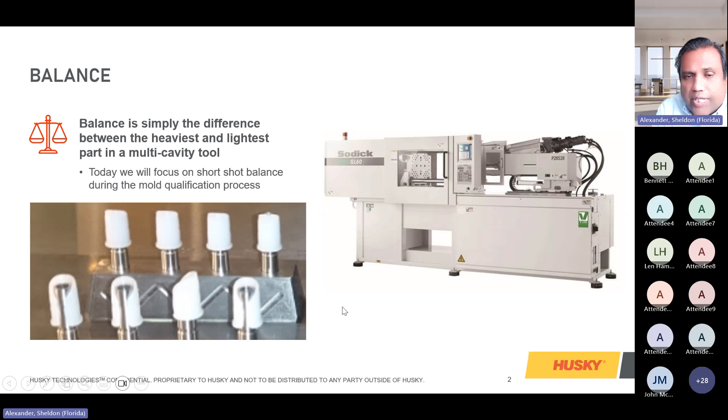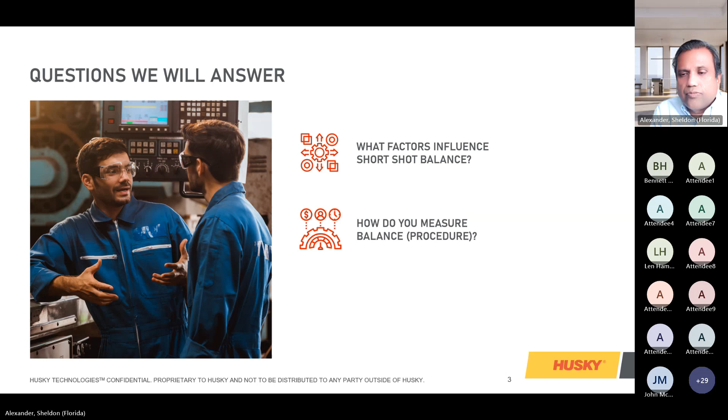All right, so balance. What's balance? Balance is simply the difference between the heaviest and lightest part in a multi-cavity tool. Today we're going to focus specifically on short shot balance, and short shot balance that's used during the mold qualification process. Questions that we will attempt to answer today are: what are some of the factors that influence short shot balance, and how do you measure balance, specifically the procedure that is used in the industry today? And then finally, balance expectations.

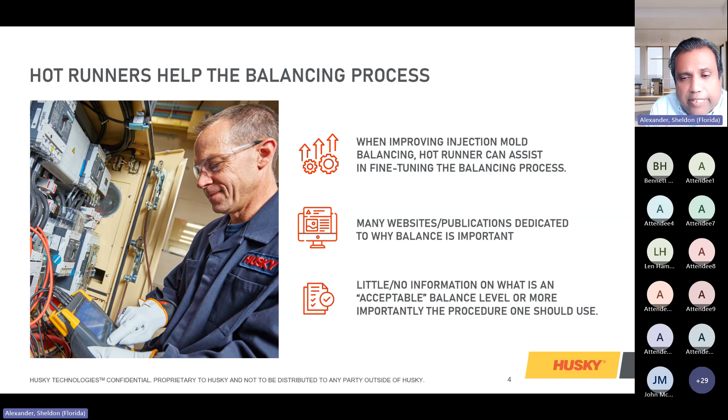So hot runners can certainly help in the balancing process. When improving injection molding balance, hot runners can assist in fine-tuning the balance process. There are many websites and publications dedicated to why balance is important. That's not something I'm going to cover today, but let's just say it is important. There is little or no information on what is an acceptable balance level, or more importantly, what procedure one should use in verifying short shot balance.

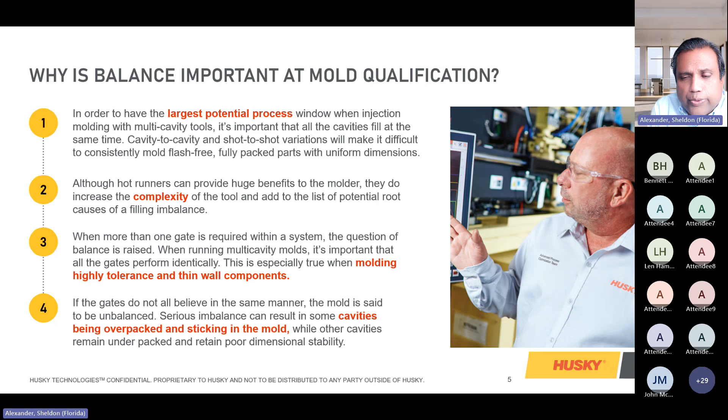And this is going to be the focus of this webinar today. So why is balance important at the mold qualification process? Well, it's important to give us the largest potential process window, especially when we're dealing with complex, thin wall, highly tolerance parts. What we can see if the mold is not balanced, we can get things like overpacking in certain cavities, dimensional instability, not just shot to shot, but cavity to cavity. But as I said, balance is an important tool, and an important variable when qualifying a mold.

So what factors influence short shot balance? First, the machine has a large impact, whether it's the tonnage, tonnage distribution, or the amount of tonnage itself, processing such as injection profile, melt preparation, cooling time, shot size, the resin, the mold, and of course the hot runner system. All of these contribute to the overall balance. For sure the hot runner geometry, shear effects, thermal profile, and gating style, whether it's a hot tip or a valve gate, play a role. I'll go into each of these variables in greater detail in the coming slides.

Here's an example of how the process can affect balance. In this application, it's a 32 cavity syringe barrel mold. Most customers and machine suppliers send the signal to open the valve stem at the same time you start injection. That causes the stems to not open all the way, at least not all of them, before you start injecting, which can lead to imbalance.

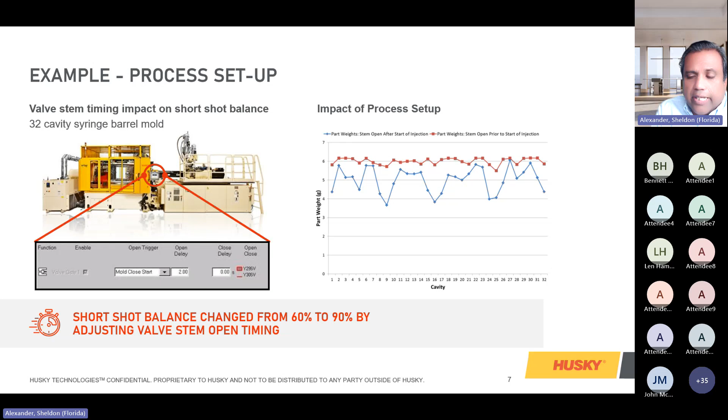In this example, we simply adjusted the stem timing, either delaying the injection or opening the stem early. One variable I like to use is mold touch — when the mold closes and touches before it builds tonnage, you send a signal to open the stem. That gives the stem about half a second to open before you start injection. As you can see, the short shot balance changed from 60% to 90% by simply adjusting the stem open timing. Either delaying injection or opening the stem early allows all the stems to open before you start injecting.

This example speaks to the resin. In this application, we're running a PC ABS system using the same mold, the same machine, the same process. The balance was about 65% using PC ABS. Switching to polypropylene, with the same machine, mold, and process except for temperatures — polypropylene runs at a lower temperature than PC ABS, but all other variables being the same — the balance improved from 65% to 93%.

This is an example of how the resin can impact balance, specifically if the resin is shear sensitive. Any styrenic base resin, whether it's polystyrene, ABS, or any resin that's shear sensitive or thermal sensitive, will have a fairly large impact on the overall system balance.

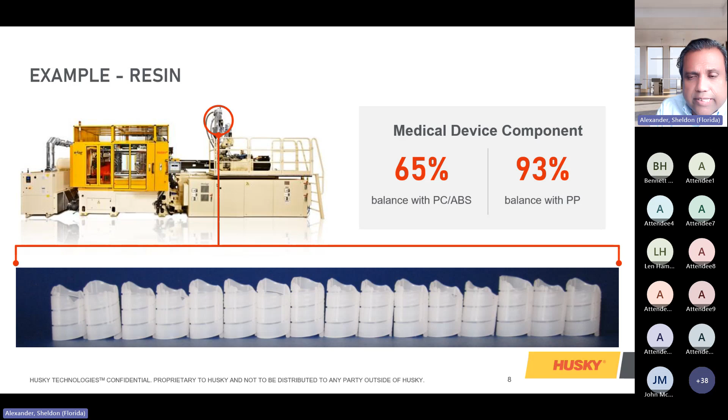For sure, the hot runner and controller can have a large effect on system balance — things like thermal uniformity and precise temperature control. I'll touch on the controller a bit, since there are a lot of controllers on the market. Some are very good, some are not so good. The way to look at a controller is like trying to reduce the light level in a room — there's a couple of ways to do that.

The first way is to turn the light on and off, say every second — on for a second, off for a second — that's one way to get 50% light into the room, but it's not the most optimal way. The most optimal way is using a dimmer switch that cuts the power by 50%. That's a good analogy for the different types of controllers out there.

What you want is a controller with PID, ideally PID squared, that gives you accurate temperature control, with algorithms tuned for the different zones. With any hot runner system, a tip zone is very different from a manifold zone, for example, so the type of control and the PID variables are very different between those two types of zones. Precise temperature control is important.

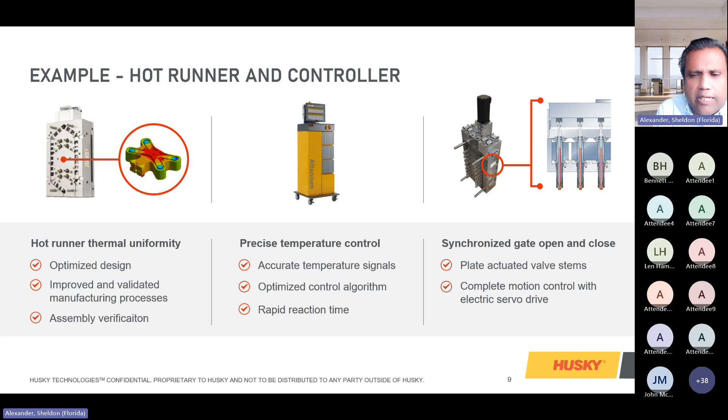Synchronized valve gate — the type of hot runner, whether it's a thermal gate or a valve gate, certainly has a large effect. Within the valve gate category, if it's a synchronized plate-actuated system or an individual system, I'll explain those differences in greater detail in the coming slide.

The most common type of hot runner in the industry today is what we call a thermal gate. I'd say this makes up about 70% of hot runners in the industry today. It was certainly the original hot runner that came out 40, 50 years ago. It's a fairly simple system, and there aren't a lot of moving parts.

After injection, during the hold stage, plastic begins to solidify in the gate. A combination of hold time and cool time causes that plastic to freeze in the gate, creating a plug. When the mold opens, it separates from the gate, creating what we call vestige, or a belly button type situation on the part. That height of the gate vestige could be about 1/3 to 1/2, maybe even 2/3 of the gate diameter, depending on the resin and the process. So the mold opening breaks that junction. Some of it remains on the part, some remains in the gate. What remains in the gate acts as a frozen plug to prevent resin from drooling into the cavity while the mold is opening and the parts are being ejected.

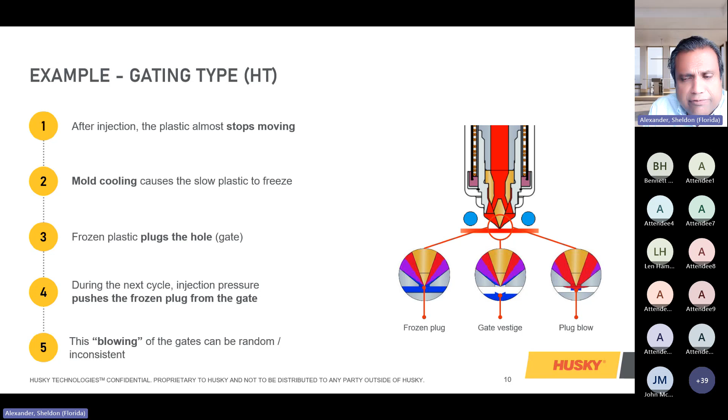Next, we have valve gates. Valve gates were the next-gen hot runner system invented. First we had thermal gates, which are still the majority of hot runners in the industry today, but next came valve gates, which work on a simple principle. Instead of relying on a thermal shutoff to freeze the gate, we rely on a mechanical means of closing the gate. You have a valve stem that opens and closes. Before injection, the valve stem opens, allowing resin to flow into the cavity. After injection and hold, the valve stem closes, pushing forward to close that gate mechanically.

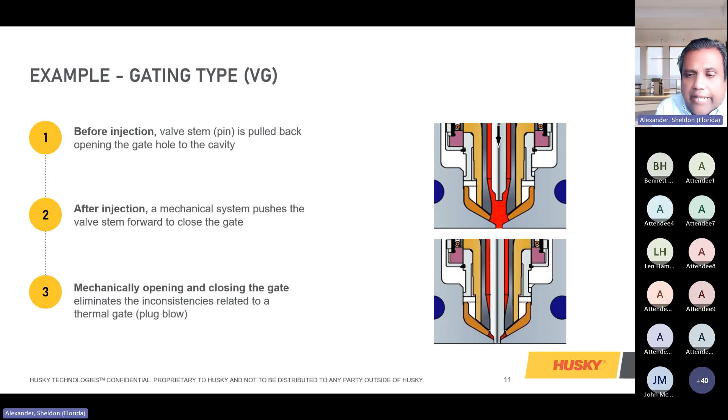As you can see, that plug blow phenomenon from the previous slide doesn't exist with a valve gate system. So naturally you get better balance with a valve gate system versus a thermal gate or hot tip system.

Next, I have an example of a hot tip versus a valve gate. As in the previous examples, everything stayed the same—same mold, same resin, same machine, same process. First, we ran it as a hot tip, and you can see with the hot tip system, the variation was about 0.44 grams, or the balance was about 70%.

Simply removing the hot tip and replacing it with a valve gate, the balance greatly improved—we went from 70% balance with the hot tip to 93% balance with the valve gate. The procedure we used, which I'll talk more about in the next few slides, was a 90% short shot balance. So again: hot tip, 70% balance; valve gate, 93% balance—a significant improvement.

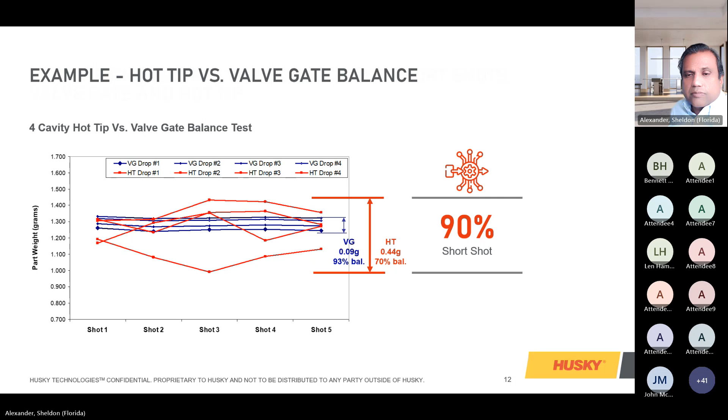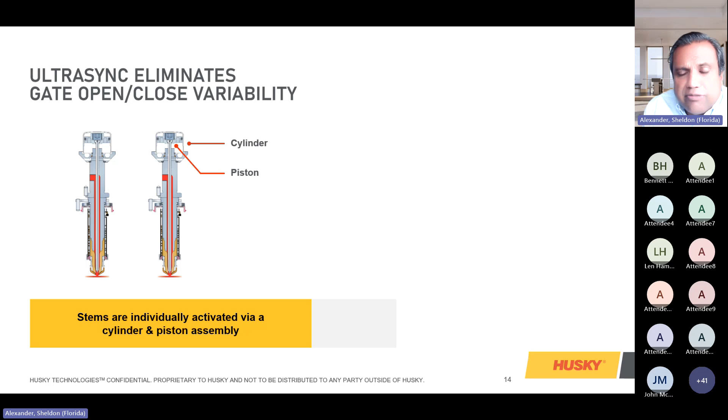So let's talk about valve gates a little bit. Valve gates are growing in popularity in the industry, specifically in the medical market. Overall, hot tips are about 70% of the market, but within the medical segment, valve gates are probably 70 to 80% of the market.

The primary type of valve gate in the industry today is individual piston valve gate configurations. Basically, each valve stem has its own piston and cylinder, and they move independently of each other. One issue that arises from that is not all the stems open at the same time, and that can cause imbalance, but also not all the stems close at the same time.

With small parts, specifically parts that Sodick machines are known for—small, high precision parts—that inconsistent closing can have a dramatic effect on the dimensional stability of the part. I'll explain that a little bit in the next slide.

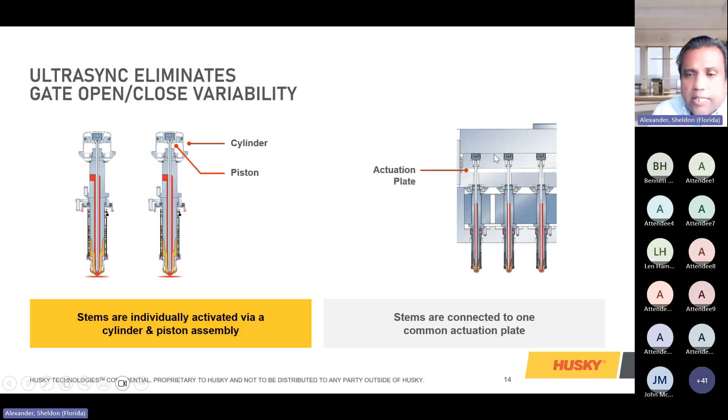As a result, the medical industry pushed us to develop a plate actuated system. With that system, as you see on the right side of the screen, all the valve stems are attached to basically an ejector plate, and that ejector plate is what's moved back and forth. That ejector plate can be moved pneumatically or hydraulically, but the optimal way to move that plate is with servo. I'll talk about that in the coming slides.

Not just in stem opening, but in stem closing—again, on very small, highly technical parts that have tight tolerances—the valve stem closing can have an impact on this. Let me explain why.

The majority of the valve gates out there use what we call a plunger shutoff. That means the valve stem is straight, and it goes into a hole into the gate detail, and usually there's a land. That land is anywhere from about 0.3 millimeters to maybe 0.5 millimeters in height, and the gate diameter is usually about 1 millimeter.

So when that valve stem closes, you need to push that 0.5 millimeter by 1 millimeter cone of plastic into the part, and that is essentially packing. If those stems are closing inconsistently, it's going to affect the dimensions. Again, I'm talking small, highly technical parts and resins.

In this application here on the top, this is a 32 cavity system. The customer suspected that the valve stem closing inconsistently was contributing to the dimensional variability they were seeing. So we outfitted the hot runner with proxy sensors so we knew when each individual valve stem closes. Not only did we see a range of dimensions across this one feature on the part, but we were able to find correlation between when the stem closed versus the dimension.

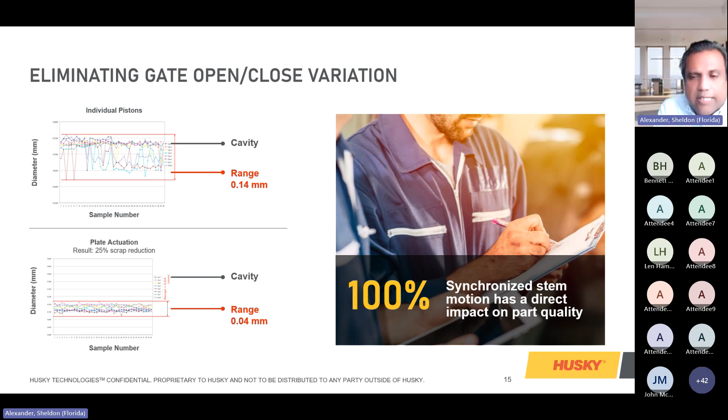So we converted the system over to a plate actuated system with synchronized stem movement. As you can see, the dimensional range dropped from 0.14 millimeters to 0.04 millimeters, and this reduced the scrap rate by 25%. So pretty dramatic improvement on this specific part because of the valve stem closing variation on an individual piston versus a synchronized valve stem movement system.

That determines your balance number as well. The more material you put in the mold, the better the balance is going to be. The reason for that is that the first-to-fill cavities slow down filling as the plastic gets to the back wall, allowing those cavities that are lagging to catch up.

So the higher percentage of fill, the better, and I'll talk about that specifically in the next couple slides. The higher the cavitation, so certainly higher than a 24 cavity system, whether it's 32, 48, 96, or 144, the more likely the balance is going to degrade as you go up in cavitation.

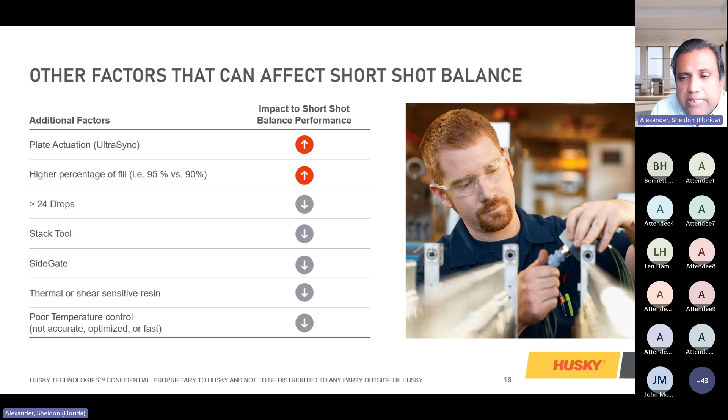Thermal or shear sensitive resins, as I also mentioned, polystyrene, ABS, nylon - these are resins where we see more imbalance issues. And then, of course, a poor temperature controller. So these are all things that can affect short shot balance performance, some positive, some negative.

So let's talk about how you measure balance. I'd say there are a couple methods in the industry, and the first is first-to-fill. On a first-to-fill method, you're focusing on that first cavity to fill. On any multi-cavity tool, whether it's 2 cavity or 144 cavity, there's always one cavity that fills first - that is your focus.

So you want to adjust your hold pressure down to near zero. You either want to keep your hold time or move your hold time to cooling. And then you want to adjust your transition point between first stage and second stage so that first part is where you'd like it to be.

An example of this is, let's say, 90% fill. Many customers I speak to have a procedure of first-to-fill at 90% of the final part weight. Variations on that are 95, 80, or 75 - any percentage really, but your focus is always on that first-to-fill part. So let's say you want that first-to-fill part to be 90%, you adjust your transition point so you can achieve that.

It will give you a correlation number, a value between -1 and 1. -1 and 1 means perfect correlation, meaning the short shot imbalance is a direct indicator of the issue you're troubleshooting. It doesn't mean it's the root cause, but it's a strong indicator that you should be looking at that. As I said, that's near perfect correlation. As you get closer to 0, that means weak correlation. So above 0.8 is strong correlation, and below 0.5 is weak correlation or no correlation.

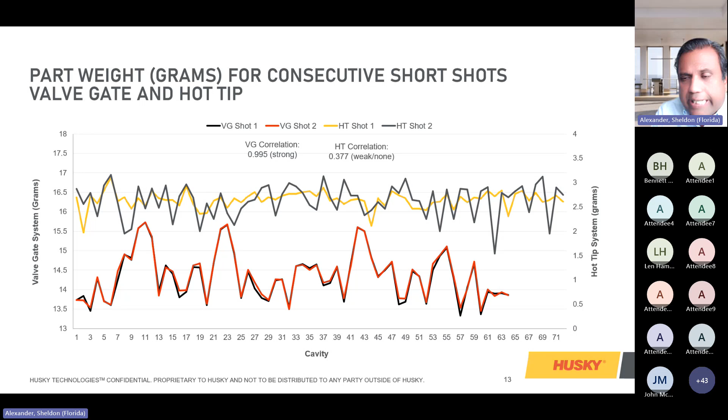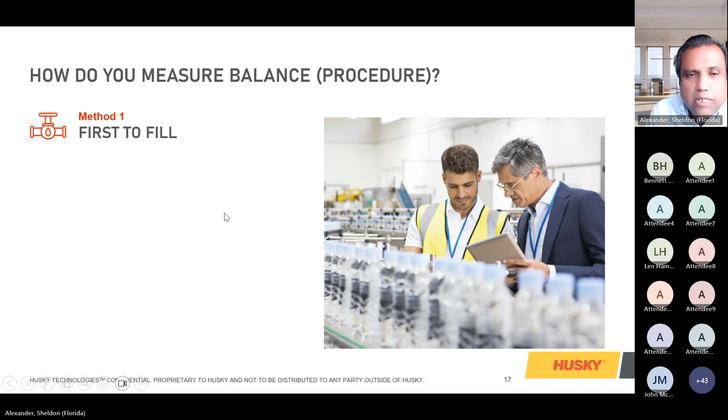Let me move forward here. As I mentioned, this is the first to fill method. I'd say probably about 60 to 70% of the customers I speak to use some variation of this procedure.

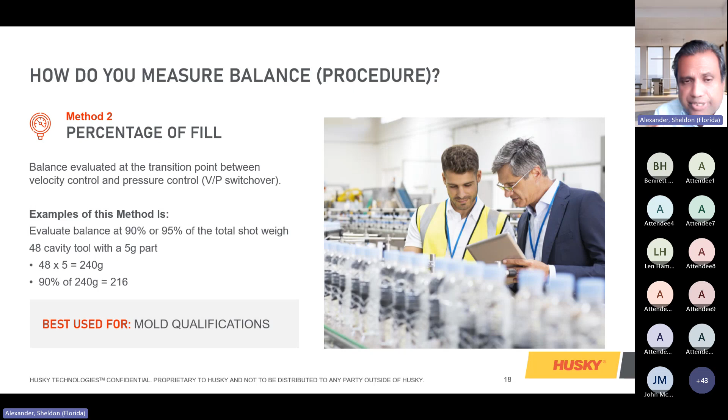The second procedure is what we call a percentage of fill. On the first example, we were focused on that first-to-fill part being a certain percentage of the full part. With this method, percentage of fill, you're looking at the entire shot size, and you want to put a percentage of the entire shot size into the mold. So let's go through the example. Same thing: you reduce the pressure to near zero, you move the hold time to cooling time, or you leave the hold time as is, and you adjust your transition point. Same as the first, but what you're looking for here is the total shot weight.

Let's say it's a 48 cavity tool with a 5-gram part weight. Full shot is 5 grams, so 48 times 5 is 240 grams. 90% of 240 is 216, so you want to put 216 grams into the mold. You do a short shot using the method and measure all 48 parts until you get as close to 216 as possible. Then you measure the parts and compare the heaviest to the lightest, and that gives you your balance number.

I prefer to use this method during the mold qualification process, and I like to use it at 95%. So I'll do 95% as a percentage of fill, and that's where I'll check my balance. The reason I do that is that it's as close as possible to what you're going to do in production. RJG and all the other guys that teach scientific injection molding talk about doing your transition from 95 to 98%. 95% is a nice number; it's at the bottom of that range. And that tells you what the balance looks like as you're going from first stage to second stage. So this is the method or procedure I would recommend for mold qualification.

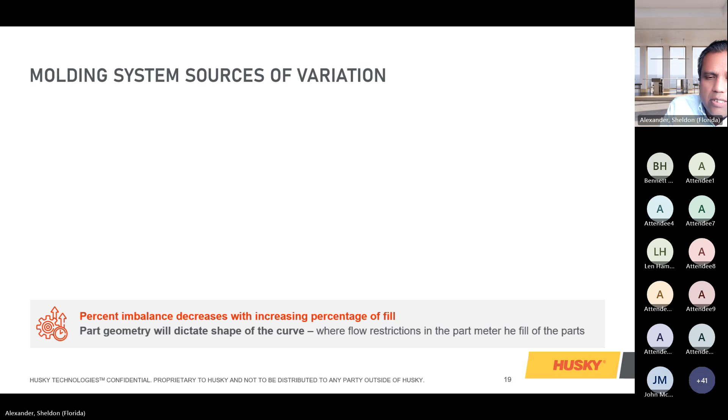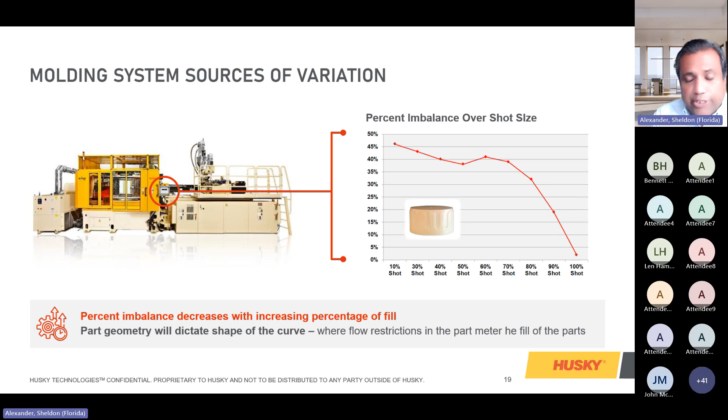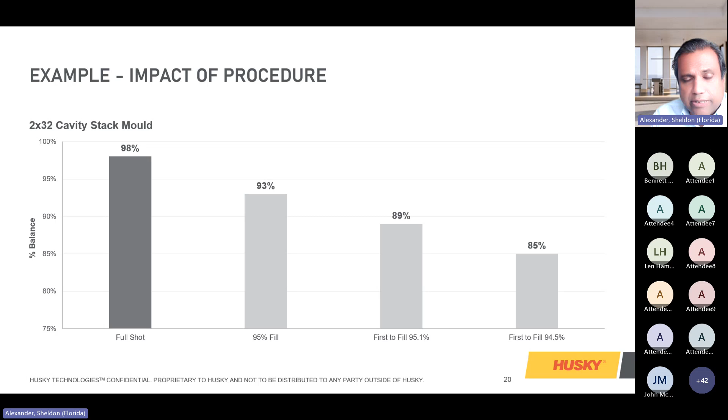So one of the questions I ask customers is, why do we do short shot balance? And the answer I get back, if I can summarize, is that the industry believes that short shot balance is a good predictor of full shot balance.

So the first to fill cavity - some of the things I hear from customers is the first cavity to fill is going to get more hold pressure and potentially have different dimensions, potentially wear the parting line more versus the last to fill cavity.

What is interesting is that the correlation is weak, almost non-existent. What that means is that the first to fill part on the short shot is not the first to fill part on a full shot, meaning there is weak or no correlation between a short shot and a full shot. So I think the data needs to be taken with a grain of salt when you're doing short shot testing.

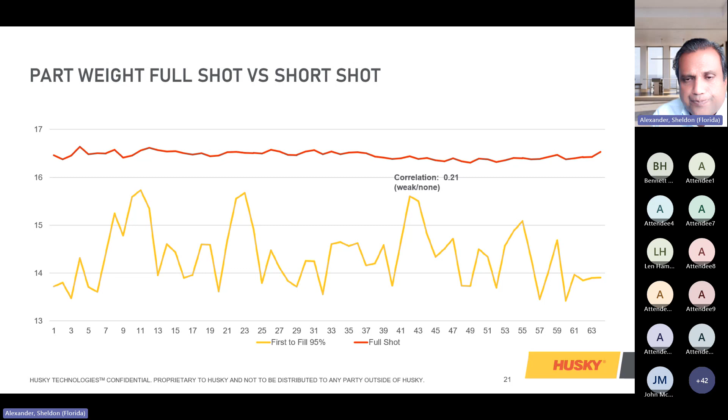So let's talk about balance expectation. As I said, this was one of the questions I hope to answer in this webinar - what's an appropriate balance expectation? I would say the first step is to determine what procedure is right for you. There is no right procedure, there is no wrong procedure. I talked about two procedures, first to fill and percentage of fill.

But as I mentioned, there are many different subsets of those procedures. As I said, there is no right procedure, there is no wrong procedure. You just need to pick a procedure that's right for you and keep that procedure consistent across all your molds. At Husky, we would recommend the percentage of fill at 95% for the reasons I mentioned in the slides before.

Once you pick the procedure, then you need to determine a realistic expectation for that procedure. So for a valve gate system, we would expect it to be 90% balanced using the 95% percentage of fill procedure that I recommend. So on a valve gate, 90. On a hot tip, 85% balance.

And as I mentioned a few slides ago, there are factors that could both positively and negatively affect these numbers. So let me give you an example. If you have a 12 or an 18 cavity or even a 24 cavity valve gate system that's plate actuated, I would expect the balance to be higher than 90. If you have a 96 cavity individual pistons, I would expect the balance to be a little lower than 90.

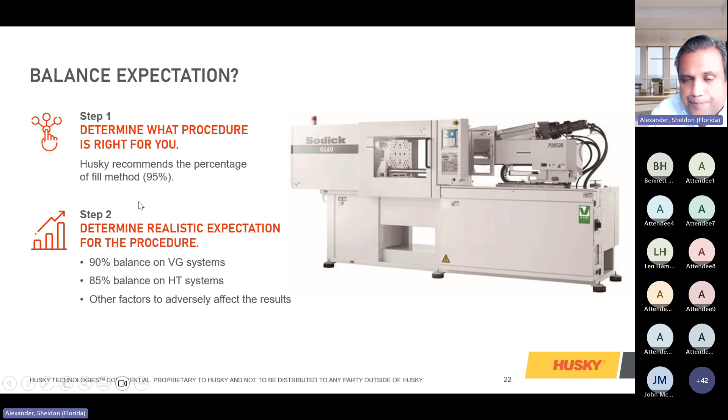So the question I get often is, okay, if I went through the process of picking the right procedure for my company and picking realistic expectations for that procedure, sooner or later you're going to come upon a mold that doesn't meet that expectation. It might be 1 in 10, it might be 1 in 25. And the question is, what do I do in those cases?

What I say to customers is that you shouldn't stop the mold qualification process. You should proceed with it. Record the imbalance that you're seeing, record all the other factors in the mold that make up a successful mold qualification, whether that's dimensions, ejection, cycle time, anything like that. If you find an issue, go back and see if there's correlation to the balance. If there is no correlation, go on and troubleshoot that issue.

But if you have no issues with the mold qualification, meaning the mold hit cycle time, the part quality is what you expect it to be, there's no ejection issue, but the balance does not meet your expectation, my recommendation is to record it and move on with putting that mold into production. I see too many customers fighting with the balance of a system for weeks, if not months, when it doesn't affect the part quality or anything related to the mold. It's a checkbox in the mold qualification process that customers feel necessary to check. I think we need to be pragmatic about it. Again, if it's not affecting system performance, record it, move on.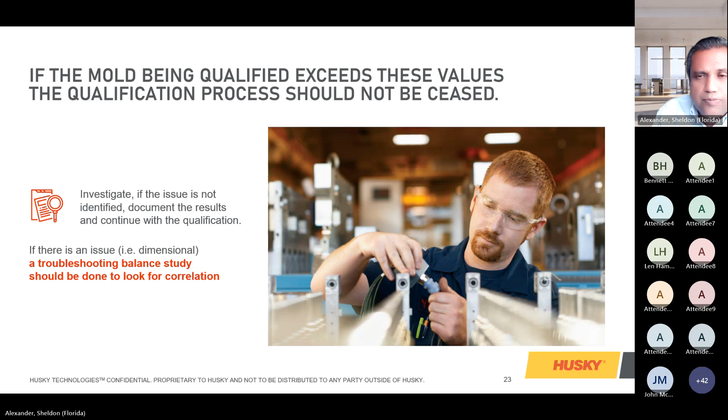So what I have here is an example of using the balance in the mold qualification process using the procedure I recommended, which is that 95% of fill. This is a 144 cavity hot tip system. Initially, the yellow line is the initial results of the balance, and you can see it was about 67%, well outside the customer's expectation. The expectation was above 90%.

It basically went from the yellow line to the dark line. Sorry, let me take that back. The original was the dark line, the first cleaning was the red line. What we saw is that yes, the balance improved, but there were still a couple cavities lagging behind. What we surmised is that contamination might be in the hot runner in the manifold itself. So we ended up sending the hot runner back to us, got it cleaned, and that balance improved to 93%.

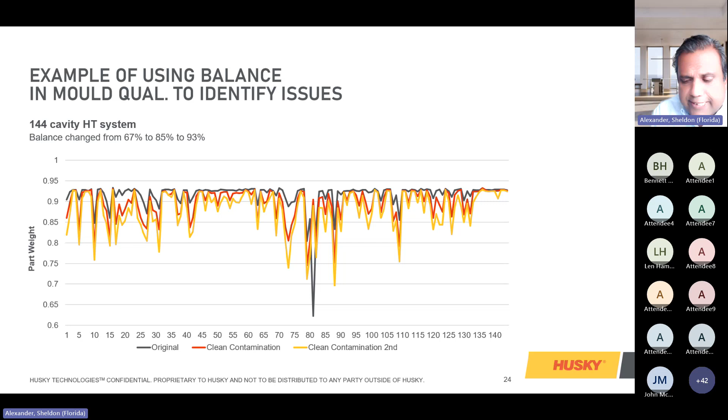So to summarize here, factors that influence short shot balance on any system - a lot of customers I speak to feel that it's strictly the hot runner that contributes to that, but it really is the entire system. Starting with the machine: the tonnage, the flatness or parallelism, the levelness of the machine, the screw design, what percentage of the barrel we're utilizing. This is one of the benefits of Sodick machines, in that they have relatively small injection units.

As well as the two-stage injection units that they're known for, where the plastification of the resin is separated from the injection of that resin. That gives you better shot control, better repeatability, and better balance. So the type of machine, barrel utilization, screw and barrel design - these things all affect the balance. Processing: injection profile, how well you're melting or preparing that resin, back pressure, cooling time, shot size - these all affect the balance of the system.

The resin, of course, as we talked about - the type of resin, the quality of the resin, how well it's prepared, is it dried properly, etc. The mold, for sure, can have a large impact on balance: cavity to cavity geometry consistency, gate diameter, L dimension, cooling layout, how many loops are in the mold. I can't tell you how many mold trials I go to where you have one in on cavity number 1, and it cycles through all 32 cavities and comes out on cavity 32.

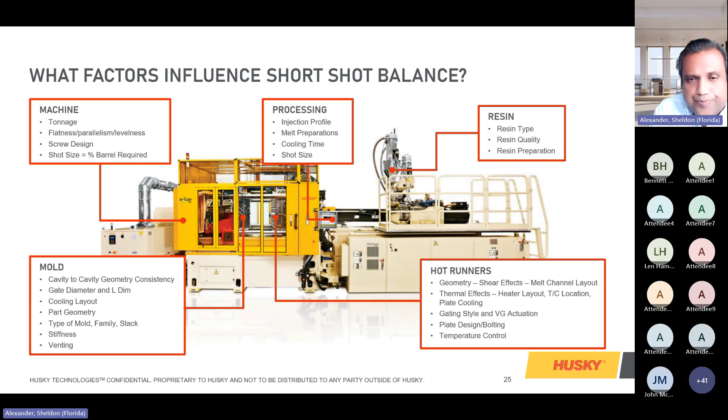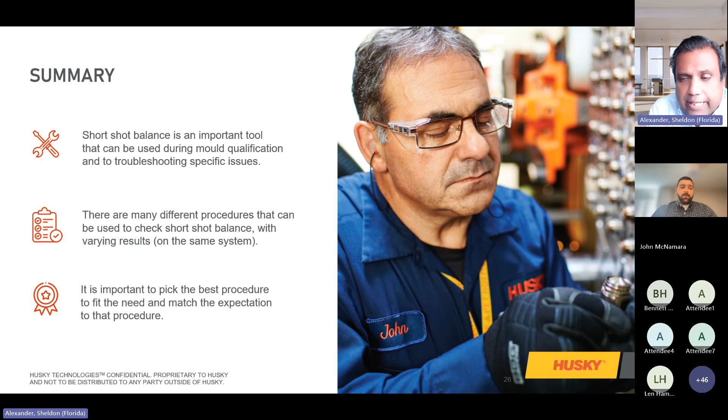So in summary, short shot balance is an important tool that can be used during mold qualification and troubleshooting, specifically if you're troubleshooting an issue. There are many different procedures that can be used to check short shot balance with varying results on the same system, so it's important to pick the right procedure for you, and to make sure that procedure fits your needs and matches your expectations.

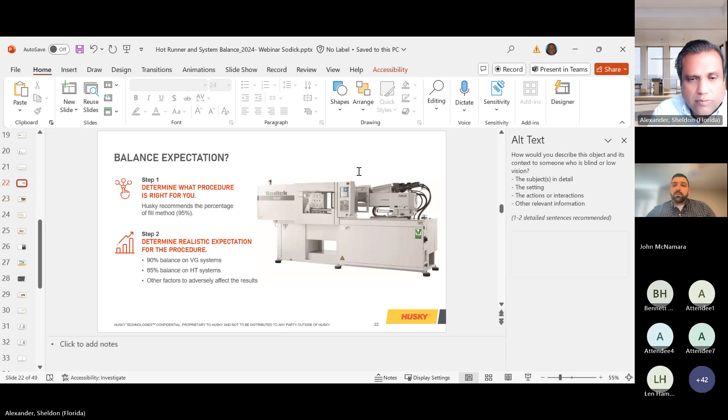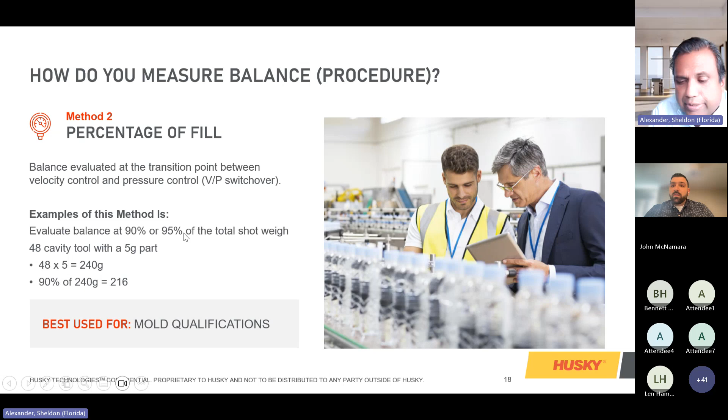Let me go back quickly here. So the procedure I would use is - let's say it's a 48 cavity tool, and let's say the full part weight is 5 grams. So the total shot weight, if you weigh all the parts, set up the process to make production parts, collect a shot and weigh it, it should be 240 grams. If you're using 90%, then you're looking at 216 grams. You adjust your transition point until all 48 parts weigh 216 - that's what I would do to get that 90% percentage of fill. If it's the previous procedure, the first-to-fill procedure, it's a similar exercise, but you're not looking at the full shot weight, just the first-to-fill part. So if the part is 5 grams on a full shot, you want 90% of that, or 4.5 grams - you want the first-to-fill part to weigh 4.5 grams.

Do you recommend artificially balancing the parts by adjusting the hot runner temps on the tips as needed? For example, raise the tip temp for the lower filled parts. I love this question. I absolutely love this question.

In my experience, I don't see a need to do that. I don't like doing that because I don't think it's necessary. So what I would say is collect short shots without adjusting the tip temps, collect full shots without adjusting the tip temps, measure the full shot part weight, measure all the dimensions on the full shot, again using all the same tip temperatures, and then go ahead and adjust the tip temperatures and do the same thing again.